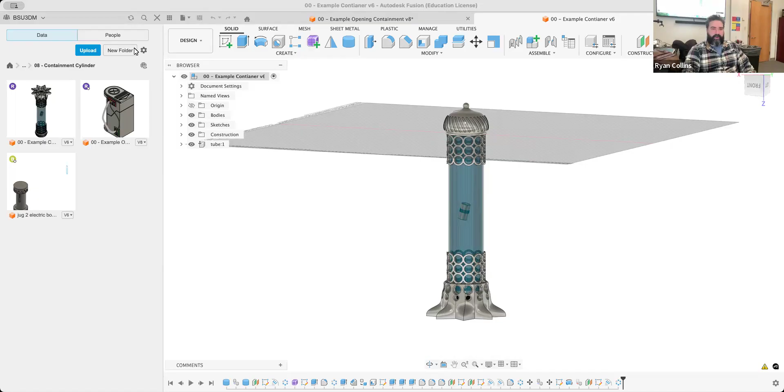Okay, so I wanted to talk to everybody just briefly about how you can add detail to your reliquary assignment. Now, again, however you approach this is up to you. You could take this as an actual reliquary, or you could take this as more of some kind of a sci-fi container, specimen container, anything in between.

But one of the main things I wanted to focus on is that this is very detail oriented. I want you to add features, details. However that ends up being, great. Now, one of the things is going to be certainly, like with this example here, appearances.

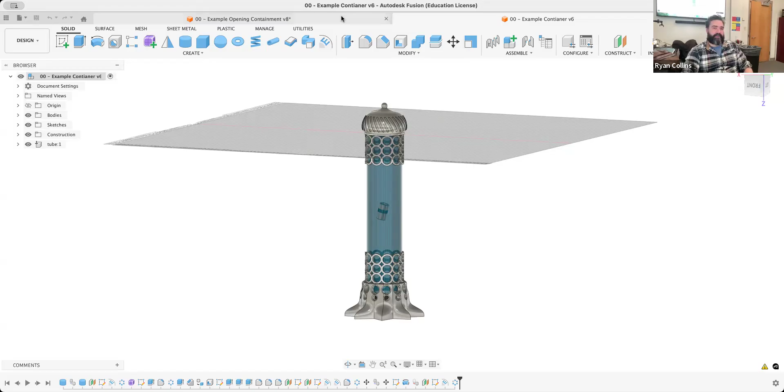I want you to experiment with the appearances as well, but these hoses, this perforated mesh and all that, that is only in the appearance. As I shift to auto color mode, you can see that is not a texture, that is only an appearance, meaning that that will not translate to 3D printing it.

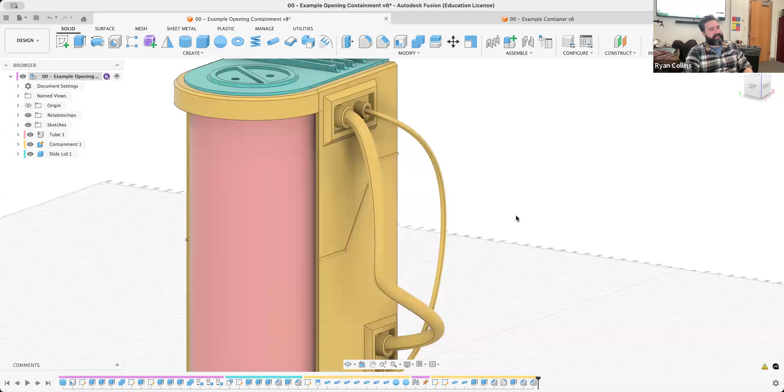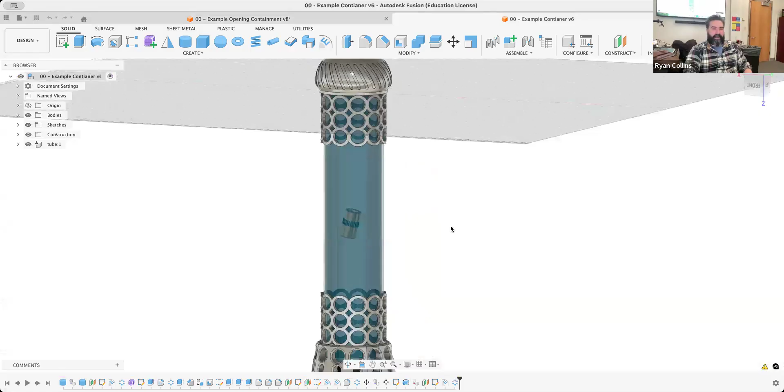You will have to choose separate materials, or you could even choose a baseline and print and paint them, whatever. But appearances are for the model and for the renderings. Physical textures are for the printing, which is why I want you to look at features, details. So with that in mind, I wanted to show you how I made some of the features on this. Now, I made this tube much too long, but it's about the right size.

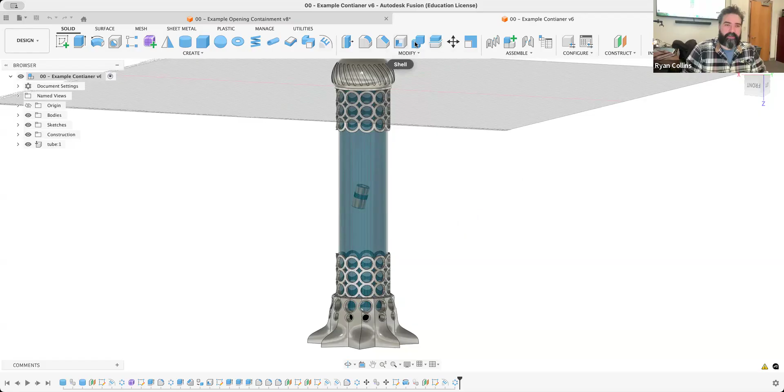But one of the main things with this is in making features that are in the round, emboss is going to be your friend. So how do I go about stuff like this? Well, let me start a new component. That way I can at least isolate these. Test relic. So I'll hide all of those originals, my tube, and all that.

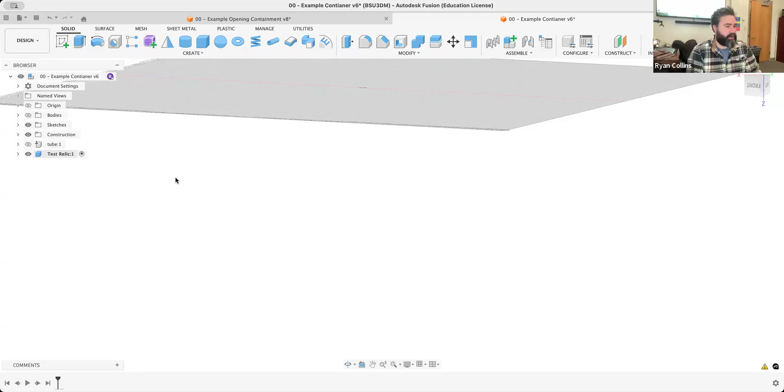So what I also meant is keep your parts separate. Keep things separate on components. Right now, I started a new component for the entire different thing. I have that component active. I'm going to start a new component right out. That's going to be my tube. So I have a subcomponent built into that. Good. Now you can start with just a cylinder if you want. That's fine.

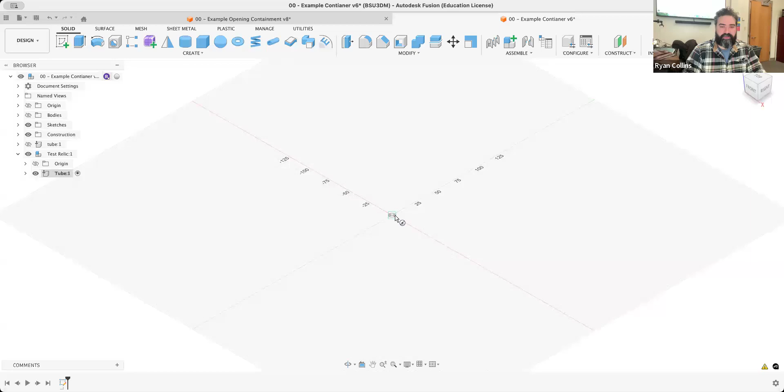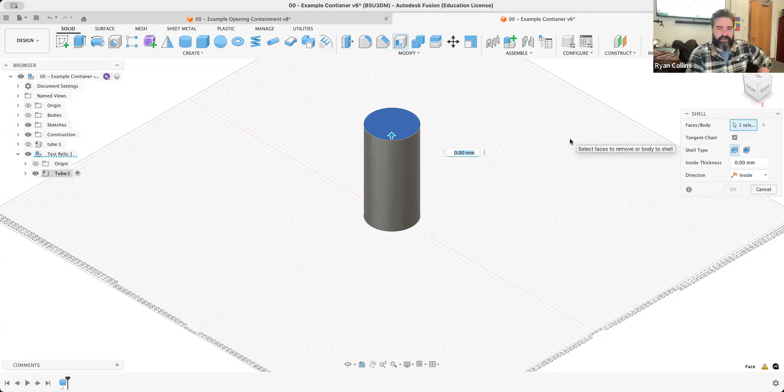Like I said, the available sizes, we'll go with something in between. Available size, 50 millimeter, which is about a 2-inch wide tubing. Max size, we'll go to the max at 100, which is about a 4-inch tube. It's going to be a tube, so let's use a shell tool immediately. And I don't have the thickness dimensioned right now, so let's just say it's going to be a 1 millimeter thick tubing. Cool. If I throw an appearance on there, you'll see the point.

Well, I already have some saved, like glass. Okay. So that's going to be my starting point. That's going to be my baseline. The reason I started with it as a component, I can isolate that. Go back up, activate the whole project, or at least this whole component. Now let's start another one. That way I have some isolation.

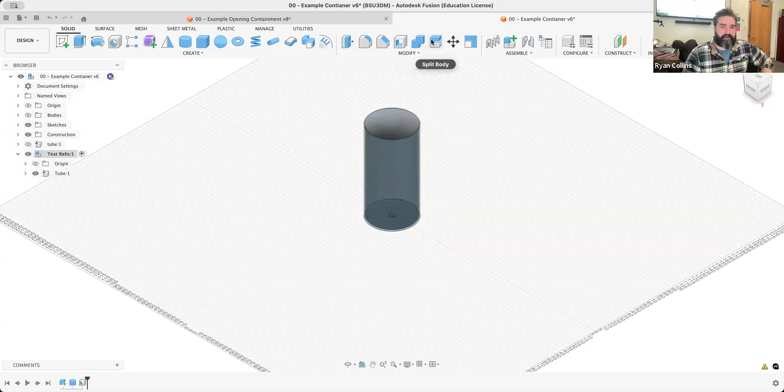And this one will be, I don't know, emboss details, if I can spell, because I want to be able to show that. Again, I can isolate these. That way, one, this will break up just for organization, but this will also break up very easily for 3D printing. So cool. I've got this cylinder. Great. But what can also really help is leave that tube as an example piece.

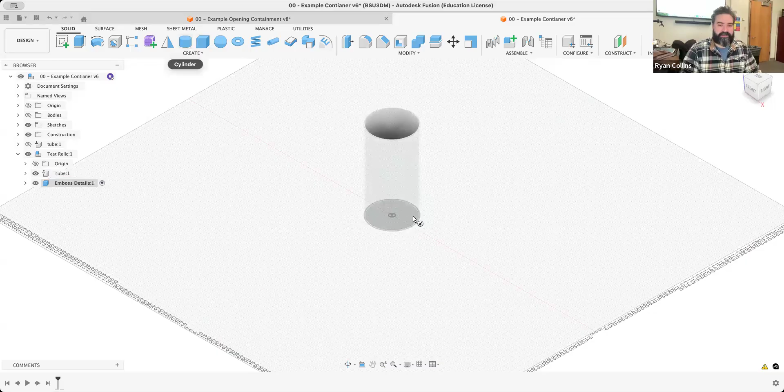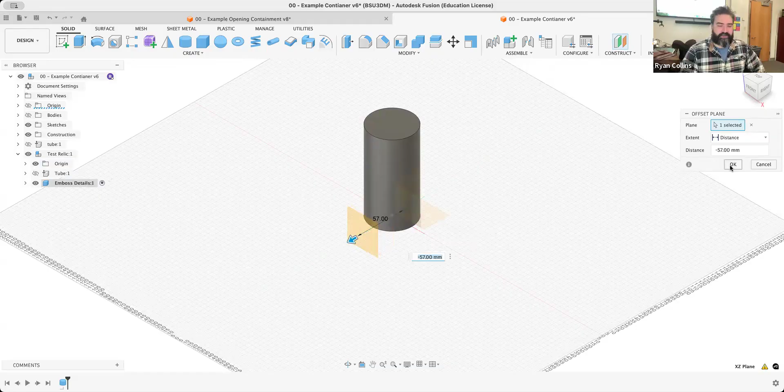And I'm going to start a new component, or sorry, a new tube. What was that? 50 millimeters. Yep. By 100. That's going to be my placeholder so I can hide the original. And the reason for this is where I'm going to build features. Don't know why the origin is hiding on that, but there we are. Throw a construction plane out front, and let's start a sketch on that.

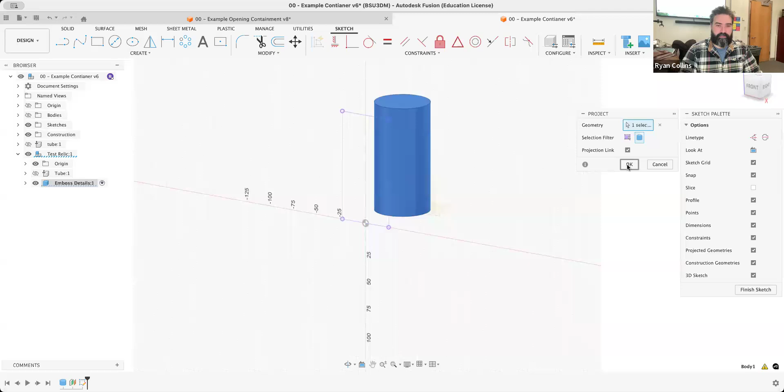All right. Use project, always helpful. To project my object, now I have an outline. Oops, I didn't project the object. I projected the features. There we go. Now, when I hide those bodies, now I have that element in there. Great. So from that, I'm just going to kind of create some starting points. Things like I started before.

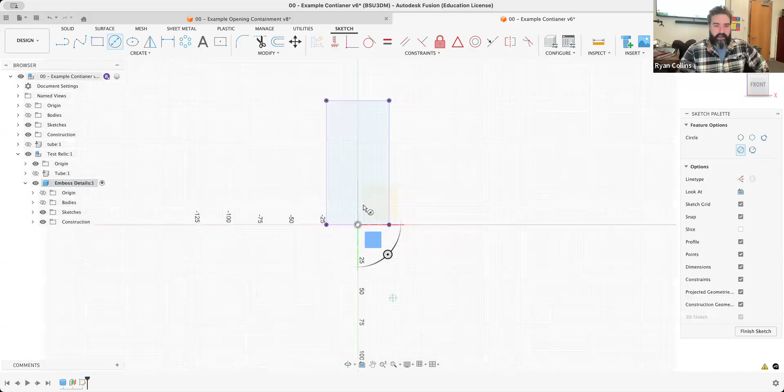Let's start a circle. And this point, right in the center, sure. 10 millimeter works for me. All right. And I'll use an offset just that way it helps me build stuff out. I don't know, one. Let's make it two. Okay, cool. Now I have this outline to work with.

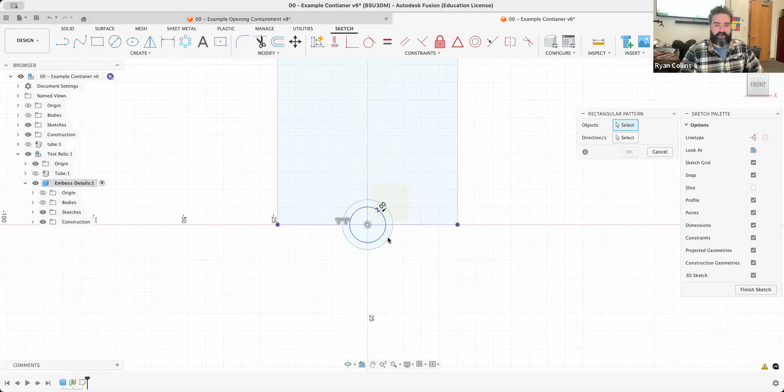From that, I'm going to start using pattern tools. Pattern tools are what's going to be the most helpful in all of this. Sure, let's use three. I'll move them out and I'll move it to where they're just overlapping or so. Fine.

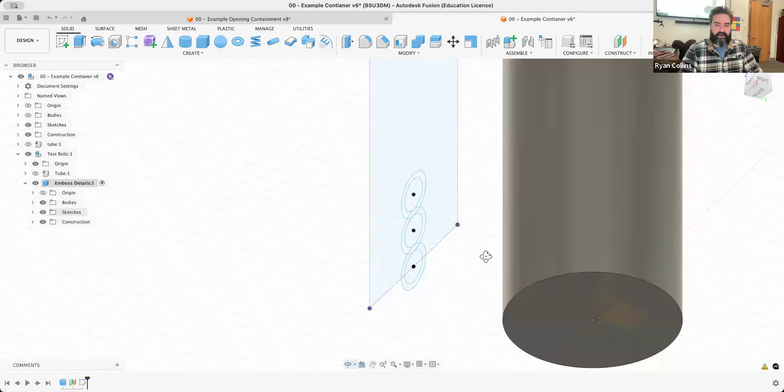Okay. All right. There we go. Now I have what's going to begin as a feature. Unhide bodies. I should have made this taller, so I'll use press pull and just extend that tube down a little bit. Just because I need to have a little bit of an extension so it overlaps.

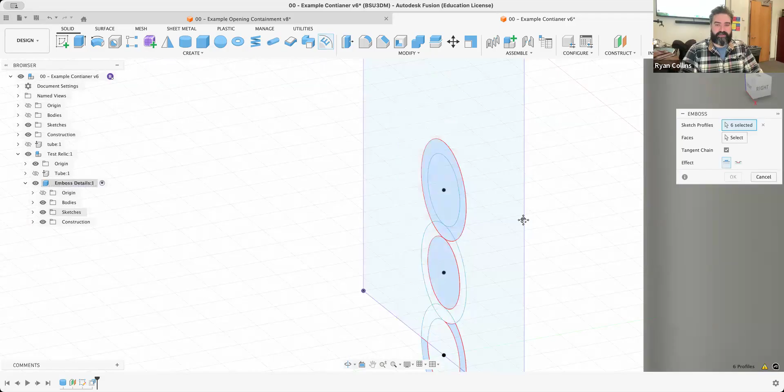Good. I'll use the emboss tool now. I've got to select all of these little features in between. Or if you go from the side, you can just use the selection box, select all the things. That works a lot better. Got to make sure you select all of them at once. There we go. Okay. I don't want the insides, so I'll deselect those parts of the circles. All right. And my faces, that.

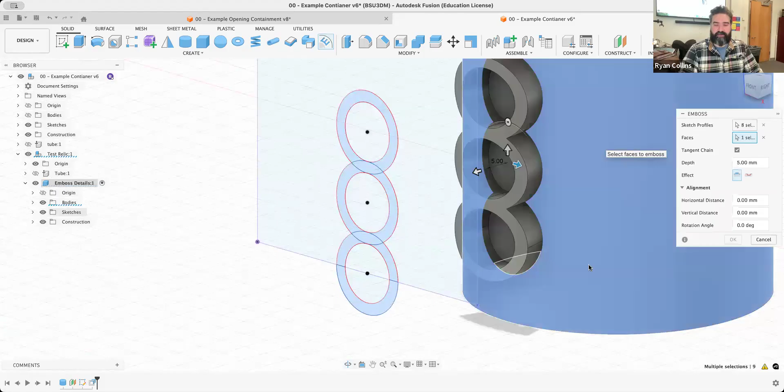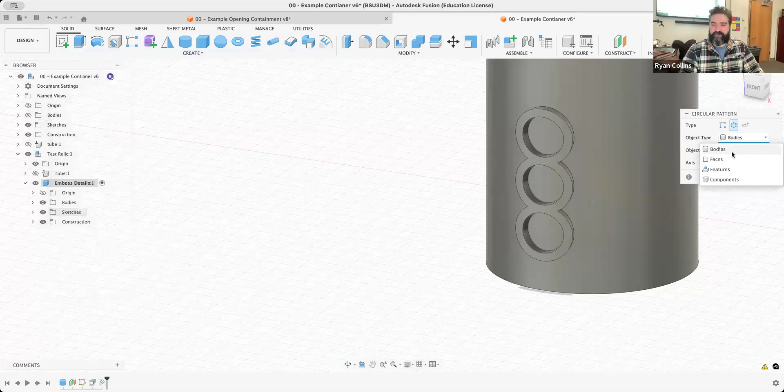And now I instantly have some feature started. Let's shrink that back down like 2. Sure, there we go. Okay. And now I have what's going to be the start of a pattern. From there, I can now switch to a circular pattern, select by features, that whole thing I just embossed, rotate it around an axis.

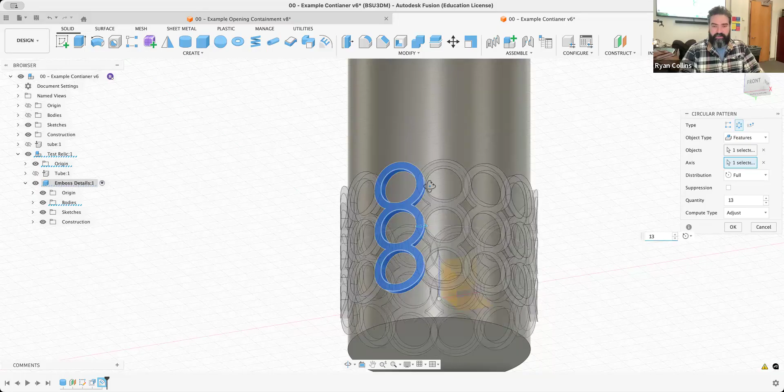In this case, why is it hiding my origin? Want the Z-axis, having trouble selecting it, so temporarily hide the bodies. Z-axis, there we go. And I'm just going to up the number of them until it overlaps. Problem is, it looks like one's slightly too many, and the next one is way too much. I don't know why it's jumping between there. There we go. 13 seems to be the right number of overlap. Okay. There we are. Now I have this much more ornate design.

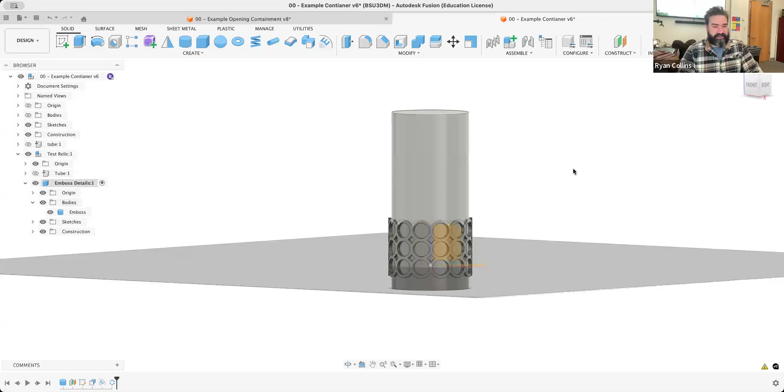Okay, the problem is that is all connected. I'll just retitle that to emboss. That is all connected to that tube, but it's not my actual tube. It's the placeholder. Because like I just explained, now from here, I can use an extrude. Why do you have to use extrude? Because I need to remove that tube or this cylinder, but I can't just delete it. Now, when I drag that downward, I'll just leave a chunk of it so you can see the remnant. Now I'm just left with that surface feature as a rounded emboss isolated.

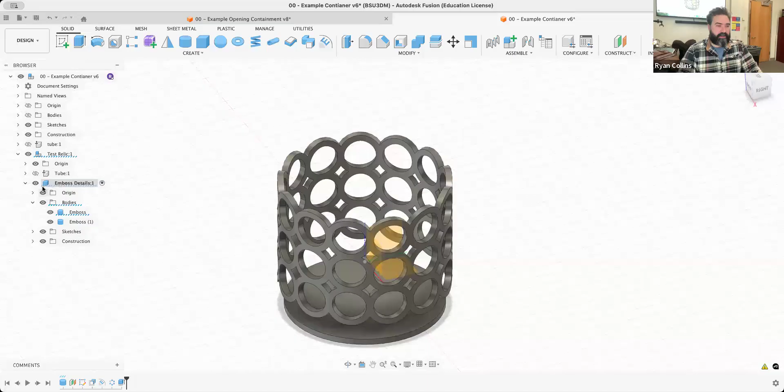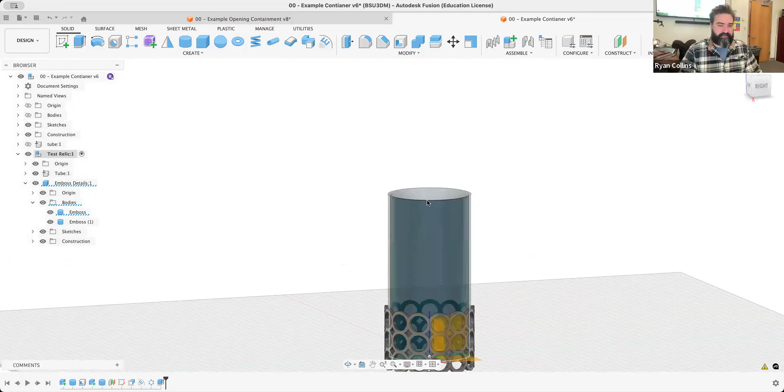Now, when I activate this whole part of the project and unhide the acrylic tube, now I have this great little shroud piece. It's very, very easy to start creating the ornate kind of details that would traditionally be around some kind of a reliquary rather. I can do the same thing here. Maybe I want to make some kind of a cap or something. Cool. Okay. Let's take those bodies since I made that deletion there. And now I'll make some sort of a cap for that.

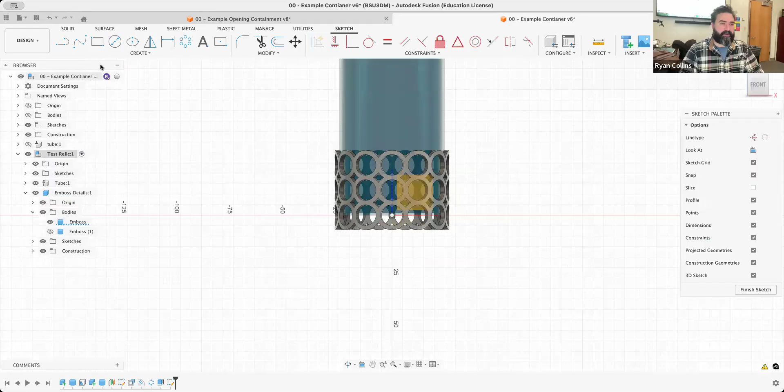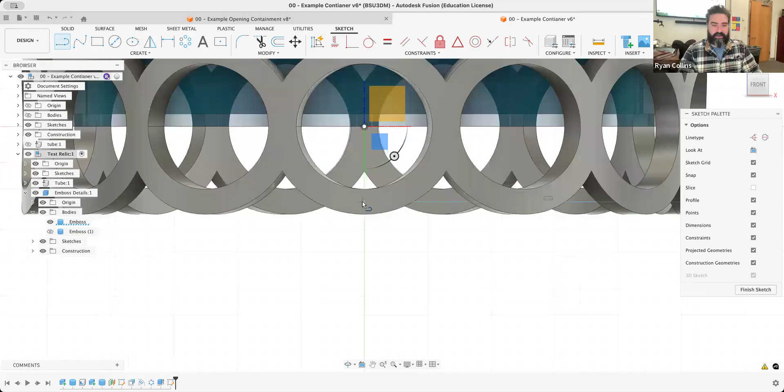Okay. Sketch not on the floating plane, but that origin plane. All right. And now I want to create a line, not entirely to the top, but kind of inside. And the reason I'm doing this is because I'm going to join these together. All right. I got a starting point there. Nope, nope. Stop it. There we go. Another line right from the center from where I just made that drawing. And let's just draw it straight down. I don't know how far I feel like going. Sure, 25 seems reasonable.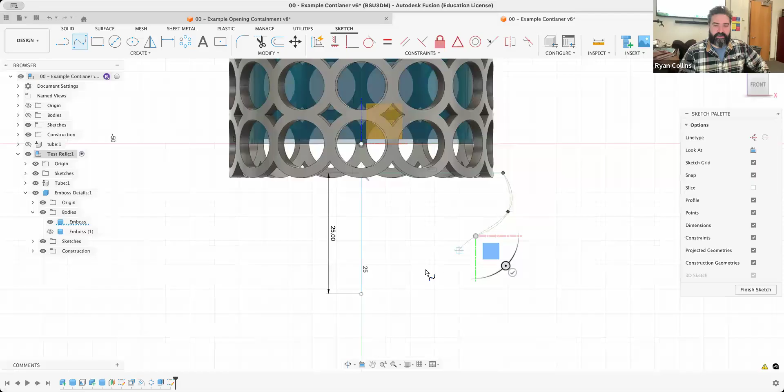Snap to center. Great. From there, let's use a fit point spline. And I'll just kind of draw some kind of a doodad upward. Okay. Reason I did that is because I'm going to make a center circle up here. Make it a little bit larger. Sure, make it 10 millimeters, whatever. Now I instantly have an enclosed surface. I can certainly, if I want, play around with constraints.

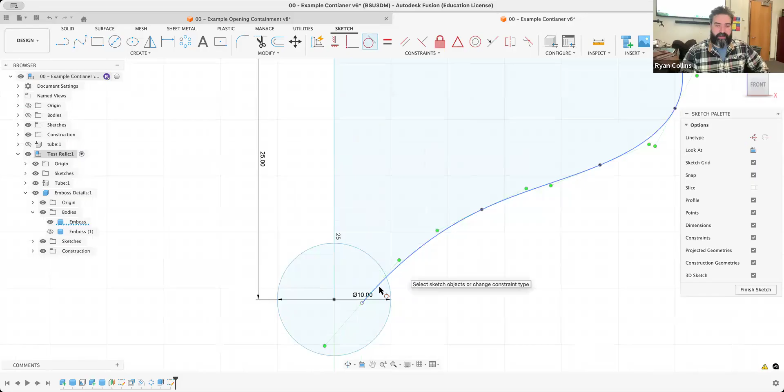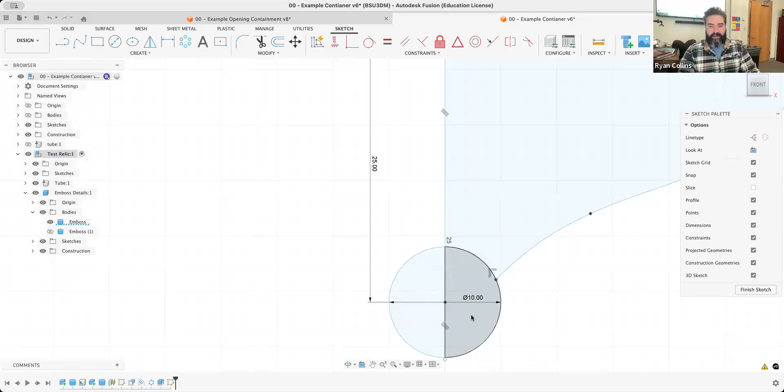Let's snap that line to that circle. Not going to let me do it because it's nowhere close to it, so I just have to literally drag this point up and over or down. Doesn't matter. It's up to you. It's your model. Okay. Now I am going to run into a problem if I try to revolve this line here. So I just need to take a little point here and complete splitting up my line. So I just have half of a sketch. Okay, cool.

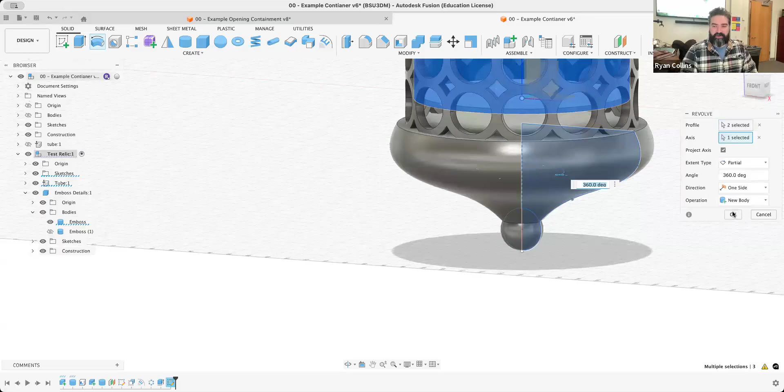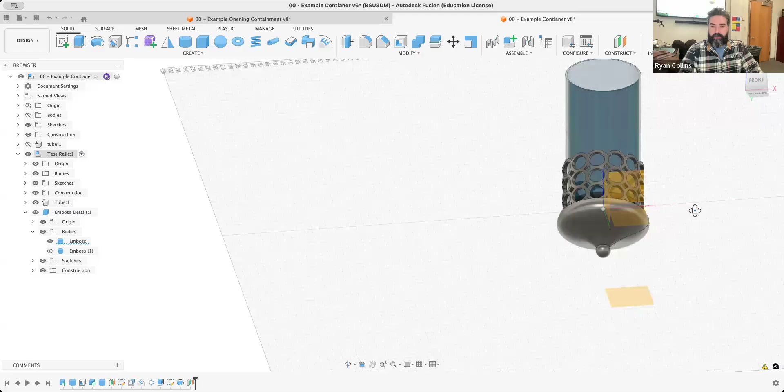Sketch, revolve, that half line right there. My axis, blue line, bam. Leave it as a new body for now because I can always join it later. There we go. Now I instantly have a more ornate cap. Cool. Okay. From there, why don't I start a construction plane from below so that I can make a sketch on that. And now I can project that rounded cap.

Okay. And let's make some details on that. Let's try something like a fit point spline that curves back around. Don't go too crazy with it. Okay. I'll use an offset. So this is a double line. I don't know. Let's say 1 millimeter. Sure.

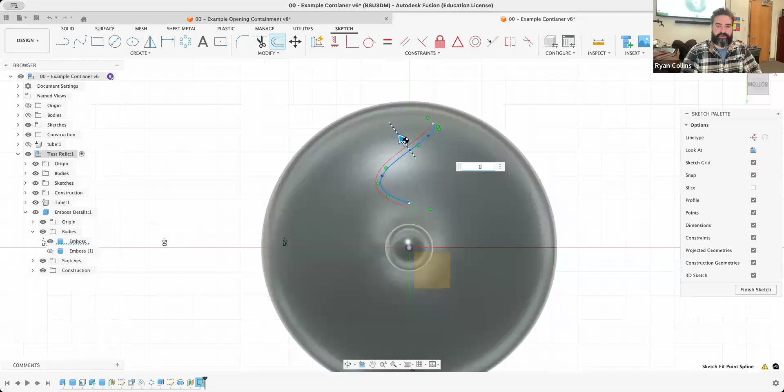Now I'm going to use a circle to close both of those up because I feel like it. 2-point circle. These are the things we did right from the get-go of this semester. Just using 2-point circles as my end caps. There we go. Okay. So I've got my little line floating above. I'm going to emboss again. Actually, before I do this, let's hit save.

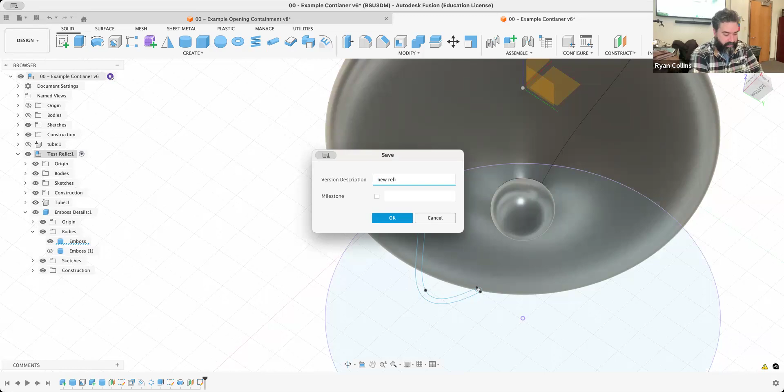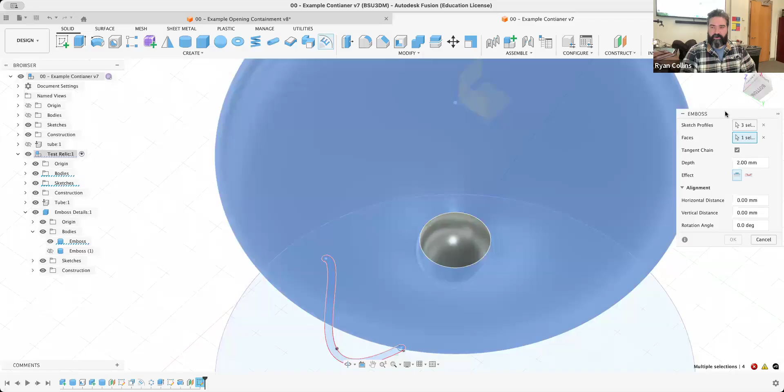New reliquary details. Okay. Before you make another adjustment, never hurts to save. Emboss, yep, I want that little sketch, but I want to make sure that I catch the 2 end circles, so don't forget that. All right, faces I want to emboss onto, the top. Uh-oh, won't let me do it. Probably because it goes too far over, and that curvature is too close.

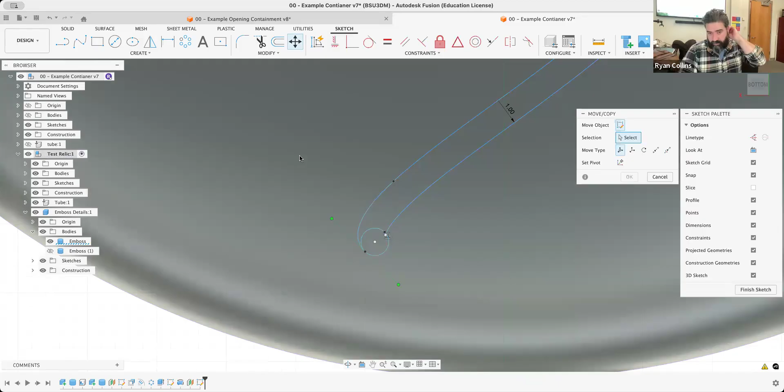Yep. So, let me go back in, edit sketch. Probably the reason is just because these points here are too close. So let me move those. Oh, this time it's on object. Great. Let's just try to move that. Yep, all of these are. Oh, no, no, no. Made a terrible, terrible decision here. That is not at all what I wanted. Looks partially neat, but not what I wanted.

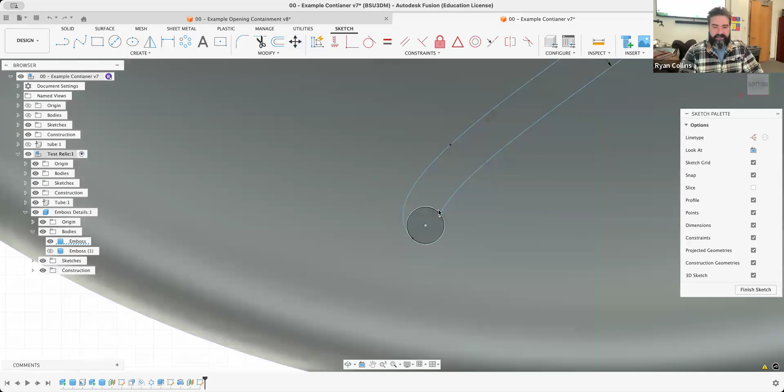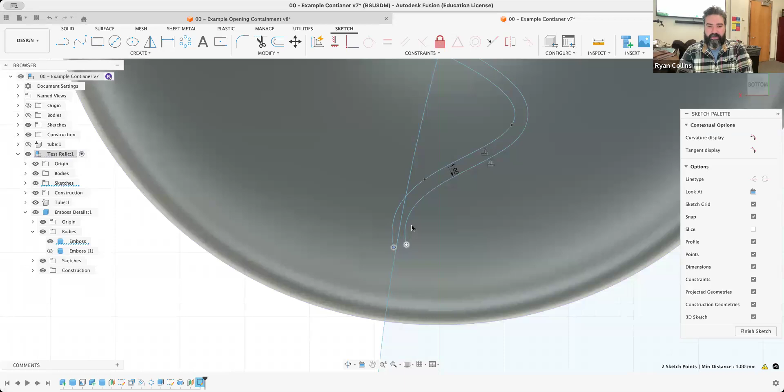So the problem is this goes too close to this edge over here. So it's going to make me delete some of this stuff. Now at least I can try to shrink this. I'm getting some real funky results because it's all offsets. But let's try just dragging this back a little bit. Oops, I had to grab both of those. Now let's drag both of those. What's happening here? It's dragging all the things, and I do not want.

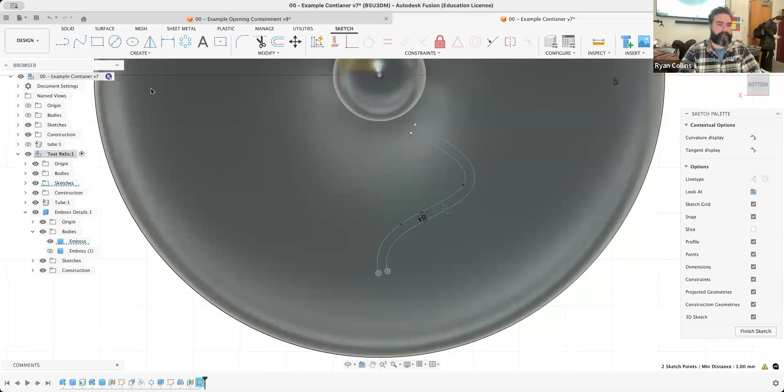What is that giant circle? Don't know where that came from. Oh, somehow it warped the original circle there. That's super weird. All right. Just trying to shrink this up a little bit so it gets a little bit further away from that edge there. All right. Let me close that back up. 2-point circles for the ends. Hopefully that fixes what I was trying to do here.

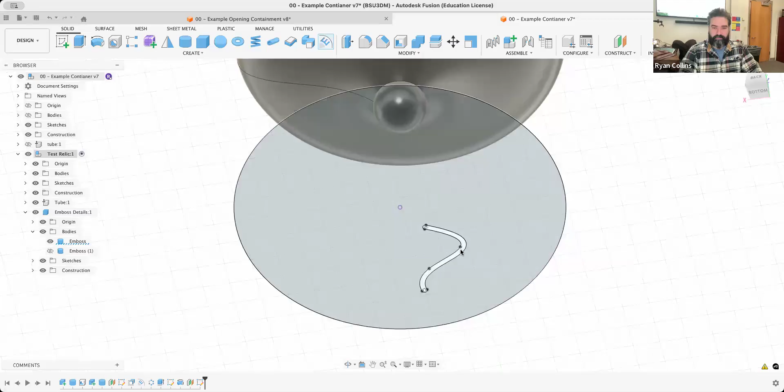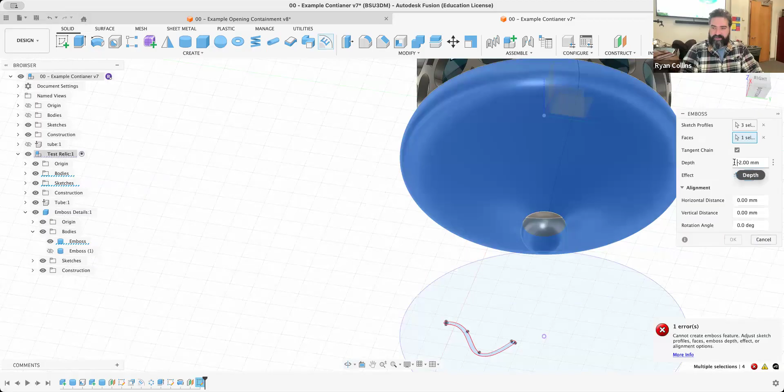Enclosed, enclosed. Cool. Okay. Let's try that again. So back to the emboss. Don't forget the little endpoints. And onto the faces. Still the error. Okay, well, ultimately, I know what the problem is because it's such a curved surface, it's trying to move around that, and it's just not agreeing. I can try adjusting the depth. Let's see if that does anything at all. Might not because it's just too close.

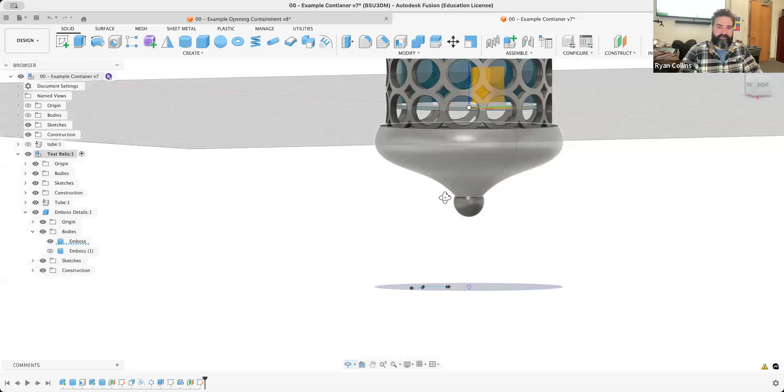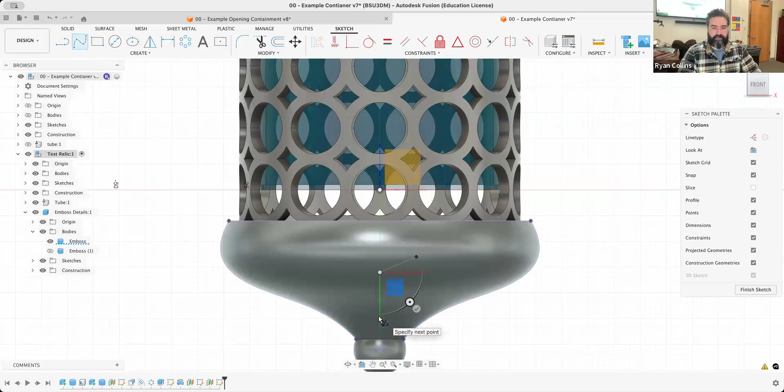So unfortunately, you run into this sometimes. So what I might have to do is just shrink the lines a little bit. Or if you're running into this and I'm trying to get it to go from below and across, what I have found sometimes it does work better to go from the front or from the side. So let me try that instead. We'll do our sketch looking straight on. Project again, that bottom. Okay. And we'll try another fit point spline, something a little bit less aggressive. Just a little curvy line. Okay.

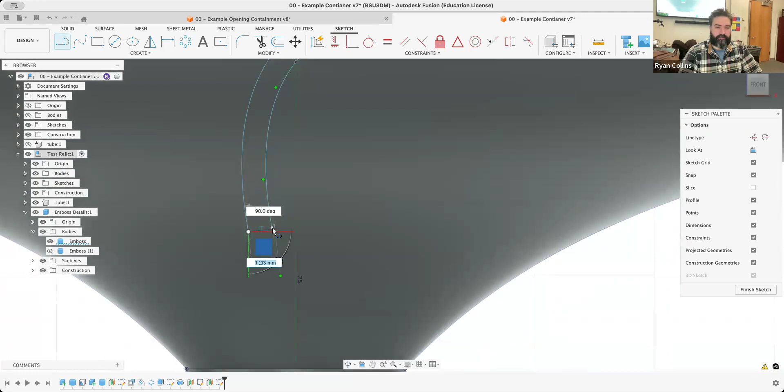And let's just close it off with just a straight line this time. That way I can just speed along here. Okay, there we go. Finish sketch, super duper. Let's try it from this side. Save. Come on. Bogging down. New emboss, sure. All right, let's try this one. That little profile onto the faces. Hey, worked this time. So, yep, sometimes it doesn't like to work the right direction, but there we go.

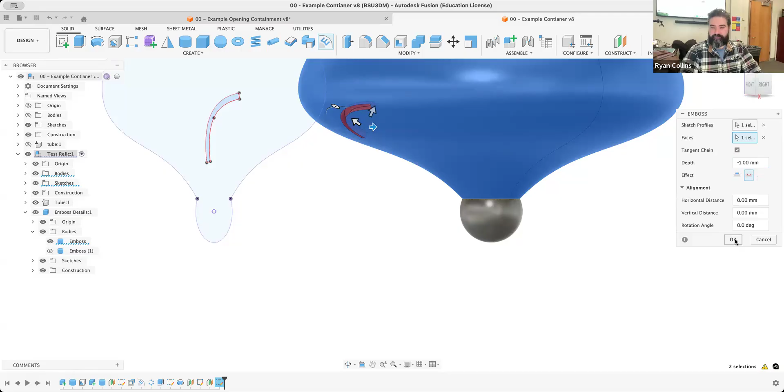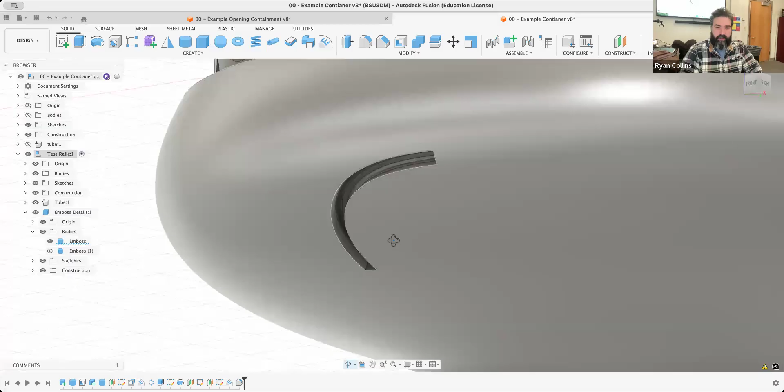Let's say only 1 millimeter, and I want to deboss it so it's inside. Okay, cool. So I got my little feature. Great. Let's throw on some fillet onto the edges or just onto that. Sure. Wait, one. Round it out more, all of that, but you get the idea.

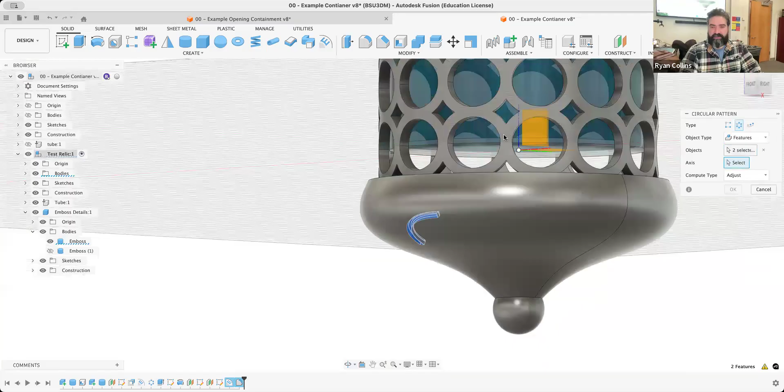All right. Now, again, circle pattern. Make sure it's by features. I'm going to try and grab all the things in here. Sometimes it is a bit temperamental. You can see my screen keeps flickering. I'm trying to just grab all the features. There we go. And around my axis, again, same Z axis if I can get at it. There you go. So just throw some more features on. Maybe don't make them overlap.

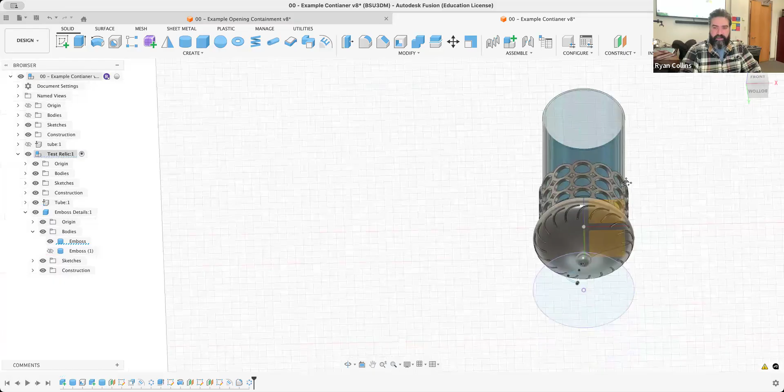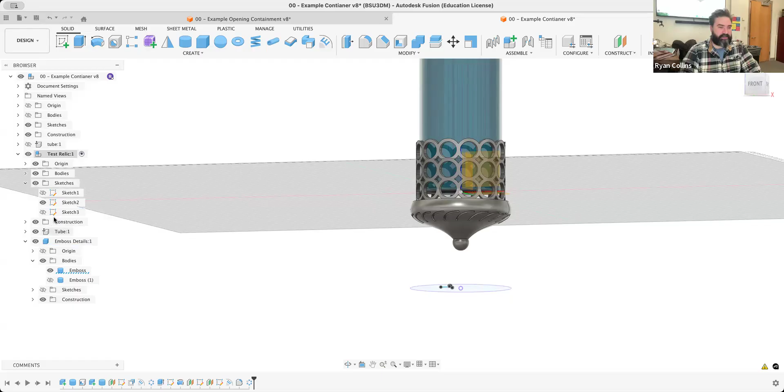Come on. And there you go. So it's really quick to start adding features, aside from when you run into problems, so that you can get some ideas down. Now, one thing I messed up on, I made my sketches with the whole project active instead of activating that part. So it does get easy to get mixed up.

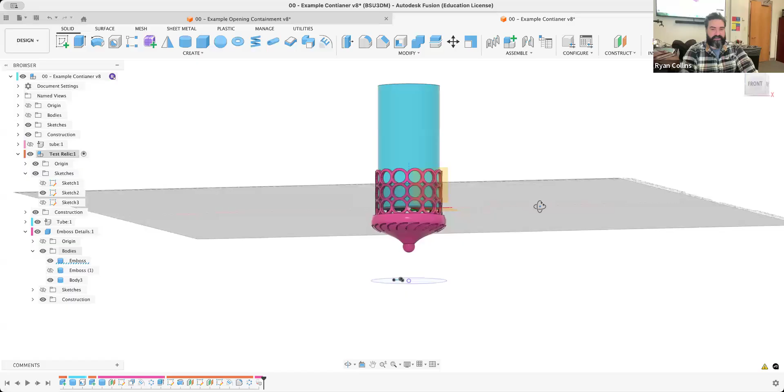If you run into that, remember that you can drag and drop stuff onto the proper component. That way, so like if I shift to auto color, at least now things stay a little better organized. And so that's an easy way to just start really quickly adding a lot of features. I'm just using pattern tools and emboss. Rotate that around, combination of rectangle pattern to make just like a vertical stack, and then circle pattern to make a thing in the round.

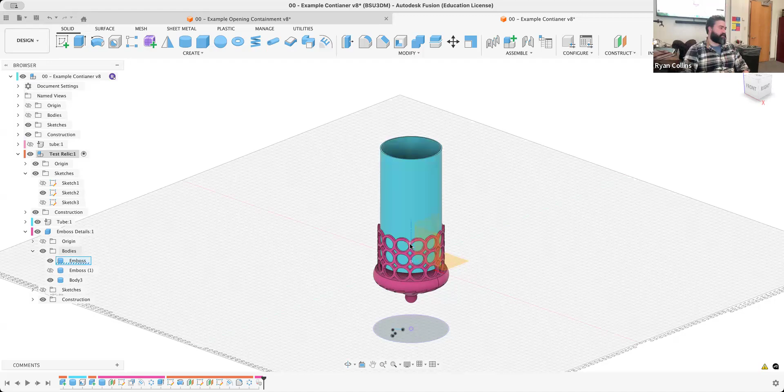The trick to making an emboss in the round that is isolated, like we're going to have to do for this tube, is model it on top of essentially a sacrificial cylinder that you can then not delete, but extrude away, because I can't just delete it. The emboss is part of that surface. But if I use extrude and just shrink the cylinder down and just cut itself away, that leaves just the surface embossment, just these little surface features as its own body.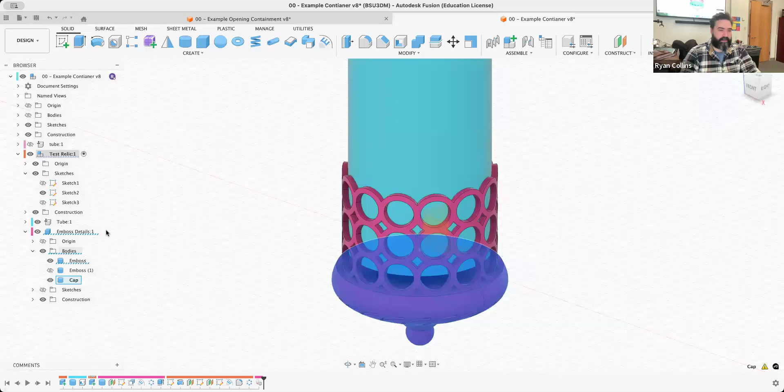And then from there, I would just say like, okay, well, I can just join those together. So that would be the cap, and then I could just join those together into a combine. Now, realistically, what I would do is also slide this into where it sockets. What I mean by that is, let's go ahead and do that combine. Let's combine the cap and the emboss. Hit OK.

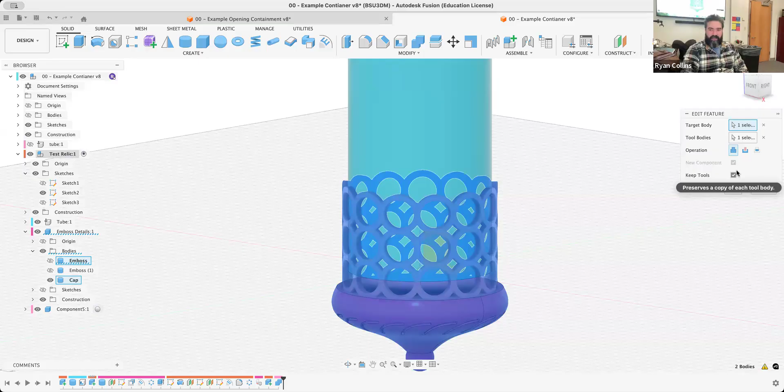Now that's leaving me with an extra one. Don't know why, don't know where. Where's the extra? Oh, I did it again. I accidentally left the whole project active instead of specifically the emboss. So I created more details. Bummer. Actually, I made a separate one because I left that. It's kept my original options where I made a new component. All right, whatever. That's fine.

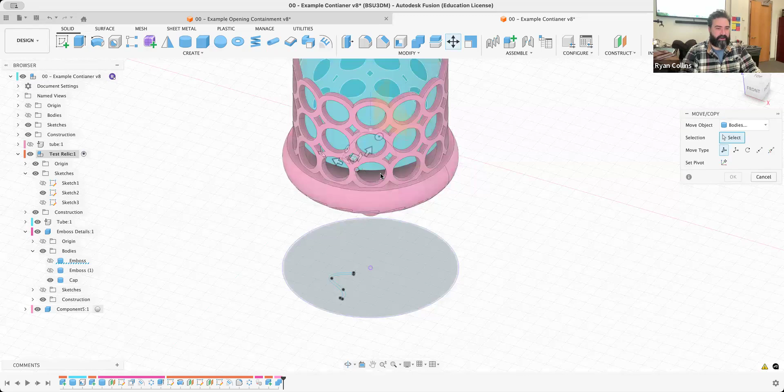The reason I wanted to join those is I wanted to show you. So if I select this object, and be cautious when you go to move an object, look at how my cursor is moving around. Lately, the move tool has not been just defaulting to like a central area. It is trying to connect to all different things. If you are having trouble trying to select where to move it from, just temporarily hide other stuff at least. And now that should let me select right in the middle. There we go.

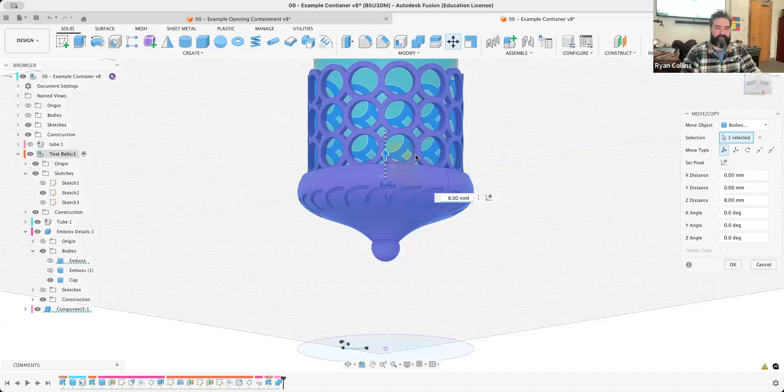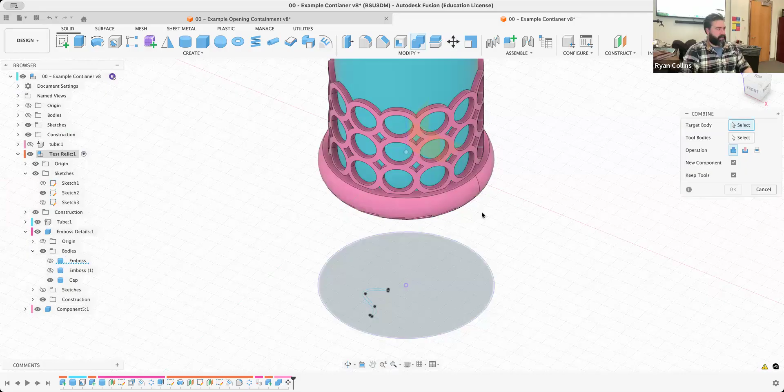And the reason I wanted to do that is just so I could move it up a little bit. One, so it makes contact with that tube, but goes a little bit up into it. Because what I'm going to do now, and I'm going to make sure that I have the correct project or stuff active, looks like it doesn't matter at this point, is do a combine cut. So the target body and the cut is into the cap, and my tool body is the tube. Make sure you keep tools. I don't want a new component, just keep tools.

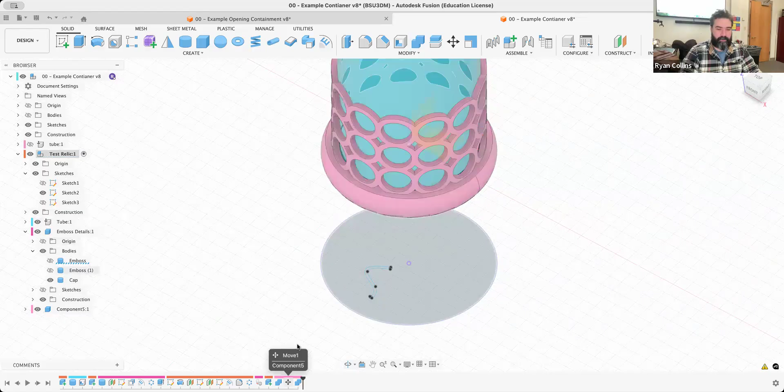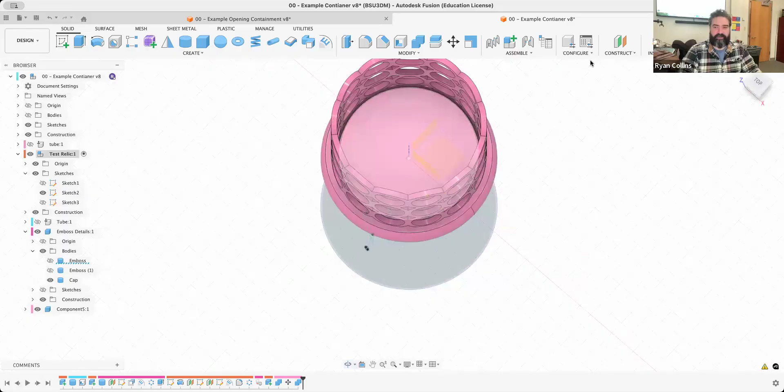And I want to cut because now when I hide that tube, oh, looks like I didn't move it quite far enough. Move it up just a teeny bit more. There we go. Now when I hide the tube, I'm left. What is happening? It's not cutting through, or am I just, oh, yeah, it is. I just couldn't see it. It's hard to see because it's right there on the edge. Let me apply a section analysis. You can see what I'm doing here.

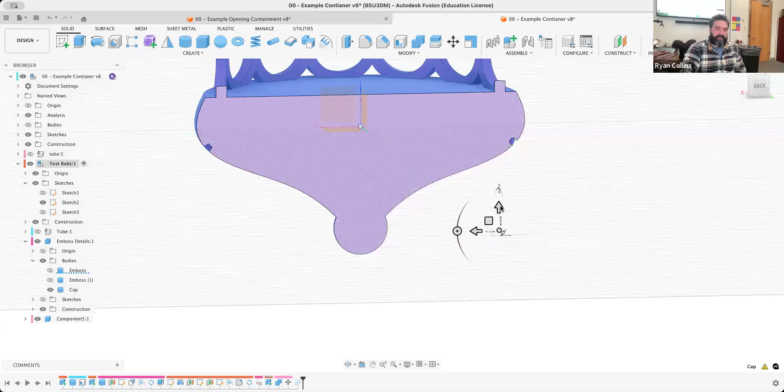Well, it shouldn't have cut underneath. I'm not sure why it did that, but I wanted to show you what'll happen. I can make this slightly recessed so it doesn't quite make contact. Oh, that's why. The tube, I made it with a shell instead of all the way hollow. Let me go back and fix that. What I'm doing is I'm just adjusting the original shell, and see how it shelled all the way around, but also left that little bottom.

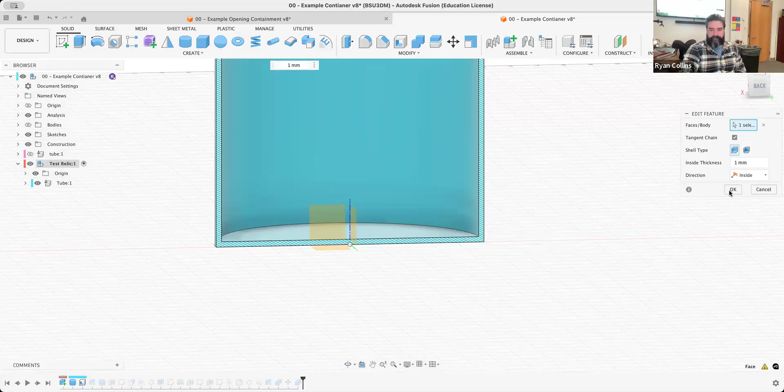Should have left it as everything, but I'll fix that later. It's not going to let me fix it right there. Anyway, I was just making a little bit of a recess there so that that acrylic tube would just socket into the printed object a little bit easier. That's it. So, little extra step, but like I said, I just wanted to show you some pretty quick ways where you can add a lot of detail very quickly to make this more ornate.

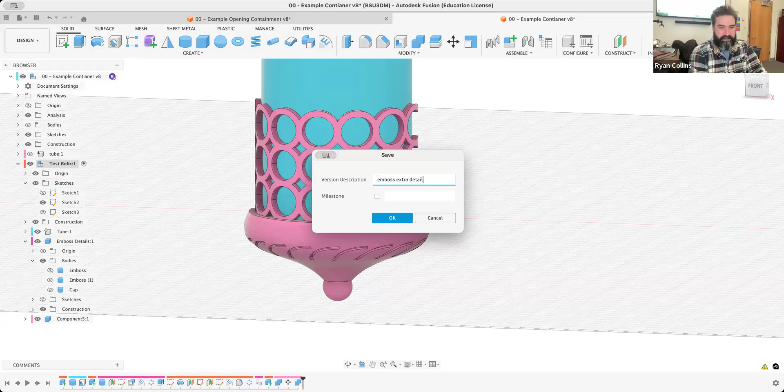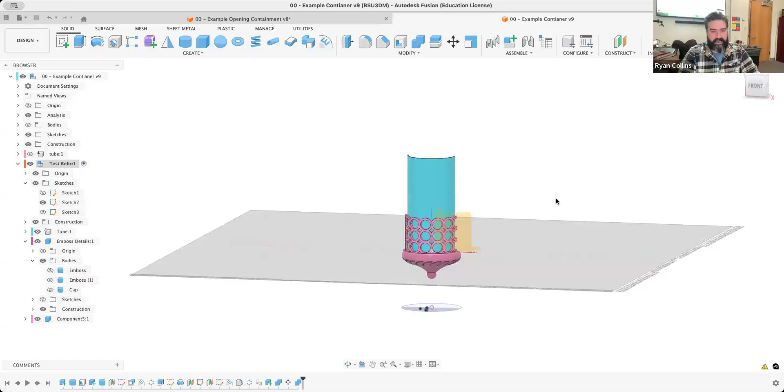So I'll save that. Emboss extra details. And I did it again to where technically I made it upside down, but whatever. So you'll make your thing. It'll have end caps to some degree, whether or not it opens directly into that cylinder, or maybe this cylinder then goes into a larger object or something. Great. But the whole thing is you will also need to model what goes inside of your reliquary. So play around with it, come up with some ideas. We'll go from there.